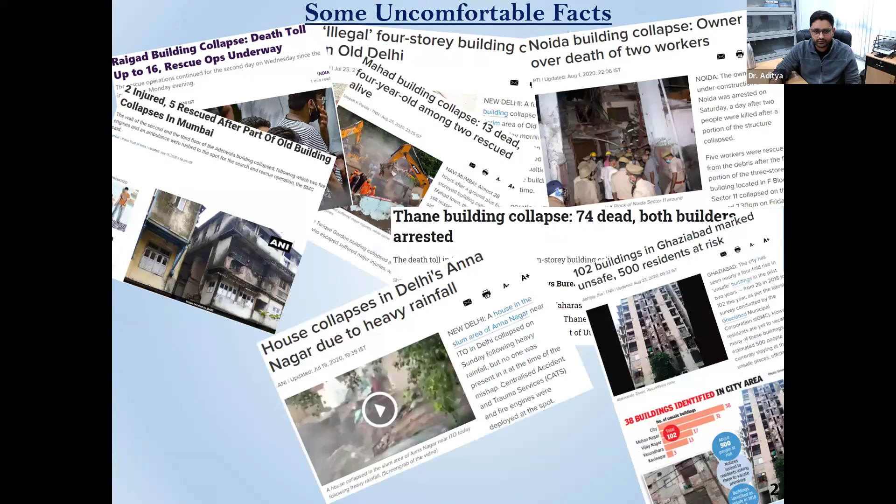Yes, so what I was talking about is this slide you are seeing, related to these unfortunate incidents that quite often occur in different parts of our country. Some important points: during the monsoon we lose more lives because of collapse than the flood itself. And as a civil engineer, do we even acknowledge this problem, the magnanimity or gravity of these problems, and what is our preparedness with respect to it?

I hope the screen and my audio both are good right now. Yes, it's absolutely fine. So now I would like to switch your attention to the statistical analysis that I have done in order to get an idea about the magnanimity of this problem.

I have taken the help of NCRB, the National Crime Records Bureau's data, for the period 1995 to 2015. This period was chosen because after 2015, NCRB stopped publishing data in this particular context, so we do not have specific data for the number of incidences of structural collapse and number of injuries. All the data I'm showing does not include losses due to earthquake; this is primarily data about collapse of structures under service loading conditions.

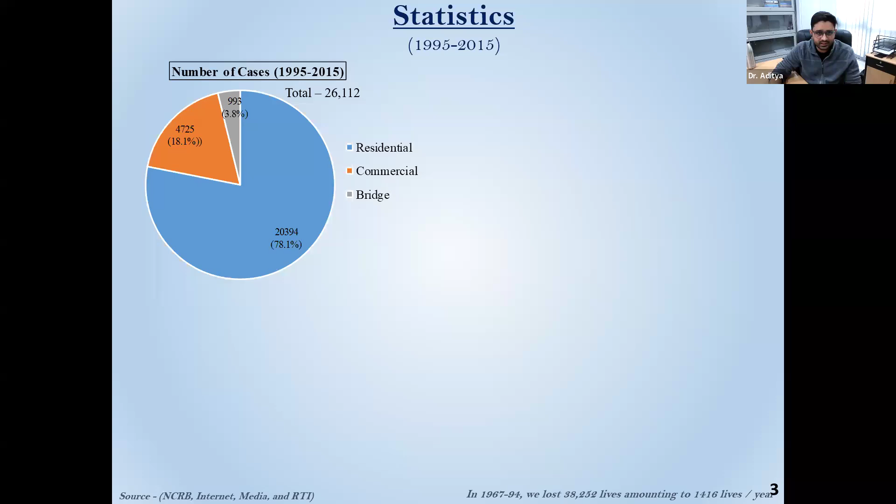In this period, the total number of incidents we saw was around 26,000 or more in these 20 years. Out of them, a majority comes from the residential housing stock, followed by commercial, and then bridges. The number of injuries recorded was up to 11,000 or more.

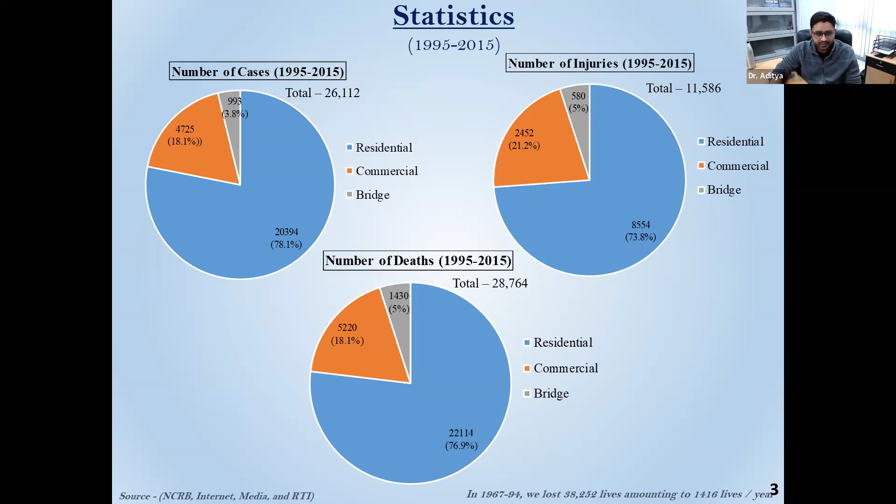These are major injuries recorded, and the number of deaths recorded is more than 28,000. So in these 20 years, leaving aside financial or other losses the country or society suffers, just the loss of human life is more than 28,000, which amounts to about 1,300 cases per year, or equivalent to about 1,450 deaths per year, just because of these collapses, though they happen in small pockets and therefore don't always come into our attention.

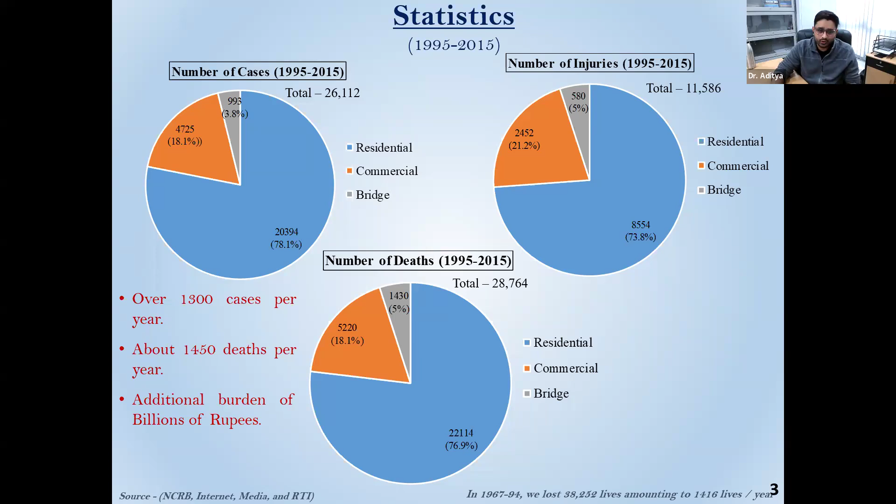Apart from these losses, we are also losing billions of rupees that the government needs to spend in order to compensate, along with loss of infrastructure and other things. So with these things in mind, achieving sustainable growth is a major problem.

When we include earthquakes also, earthquake alone caused approximately 14,786 deaths in this duration of 20 years, which is equivalent to 821 deaths per year. But if you exclude the Bhuj earthquake, which happened in 2001, this number comes out to be very low.

If you see, earthquake causes only 60 deaths per year. I'm not saying earthquake is not important—it is a major natural disaster. But in terms of loss of life and number of incidences, the losses we suffer because of gravity loading conditions are a very important and huge number.

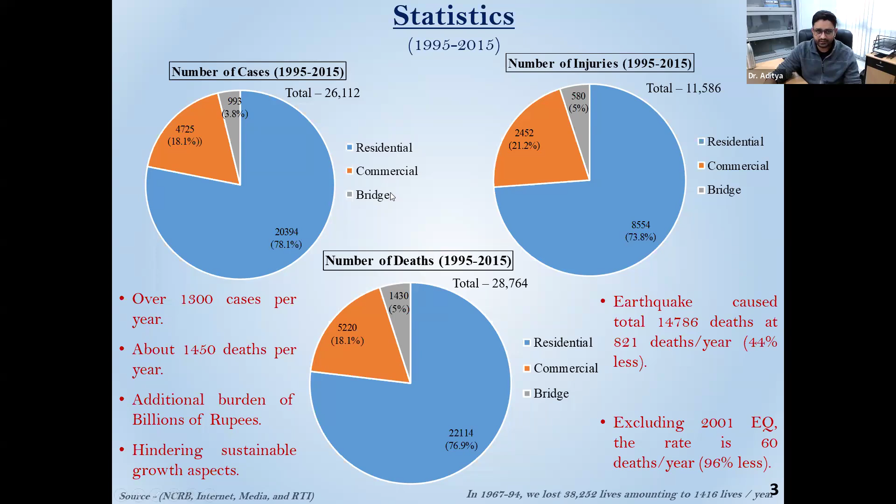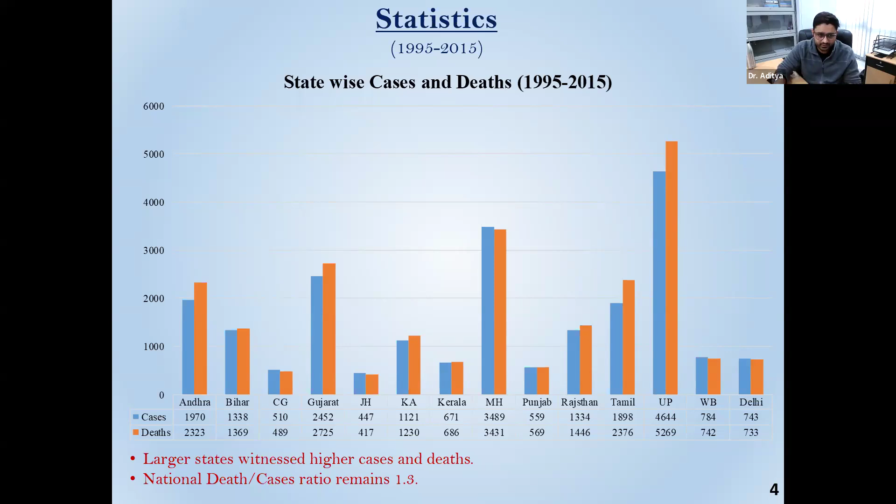So that's the importance of this particular domain. If you see the status with respect to different states of India, it is directly proportional to the population as well as the number of modern or high-rise structures present. The more industrialized or populated the state is, the higher the number of collapse cases and deaths. I hope this gives you an idea of how serious this problem is in terms of its consequences.

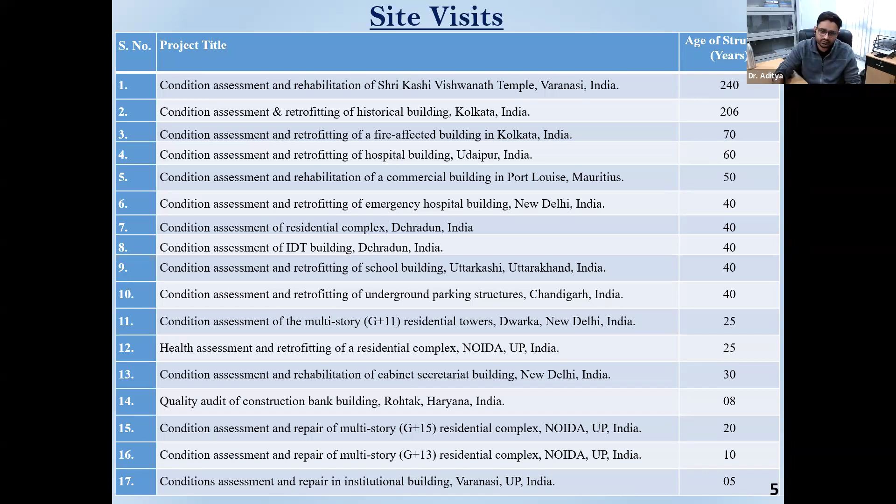Now within these structures, I want to pick only 5 types and give you a brief of these case studies, to show how the problem of dilapidation or premature aging looks at the site, and what could possibly be the reasons. For these 5 structures I have hidden the identity or project details, but just to give you an idea: case number 1 is a commercial building, G+3 story, a normal building with an age of 8 years.

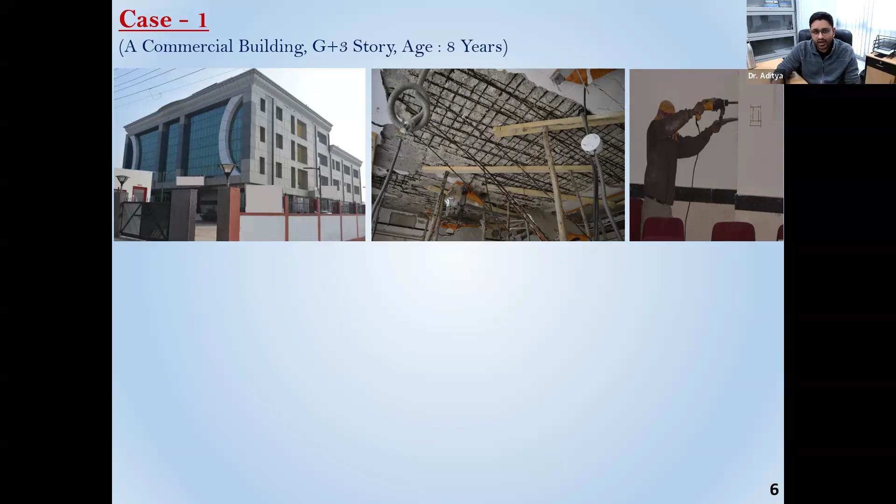So to save the life of the occupants, we had to order the entire building to be evacuated, and then a detailed investigation was done. It was an interesting case for us too—a building as young as 8 years, how could such an amount of corrosion occur?

We started to examine different sound-looking places across the structure, and found that even if the surface of the column, beam, or any RC member seemed fine from outside, when we drilled till the reinforcement level, we found severe corrosion at the reinforcement level. That was true for all cases—column, beam, slab, different locations, different floors, everywhere. So it was certainly a case of corrosion going on constantly in the reinforcement.

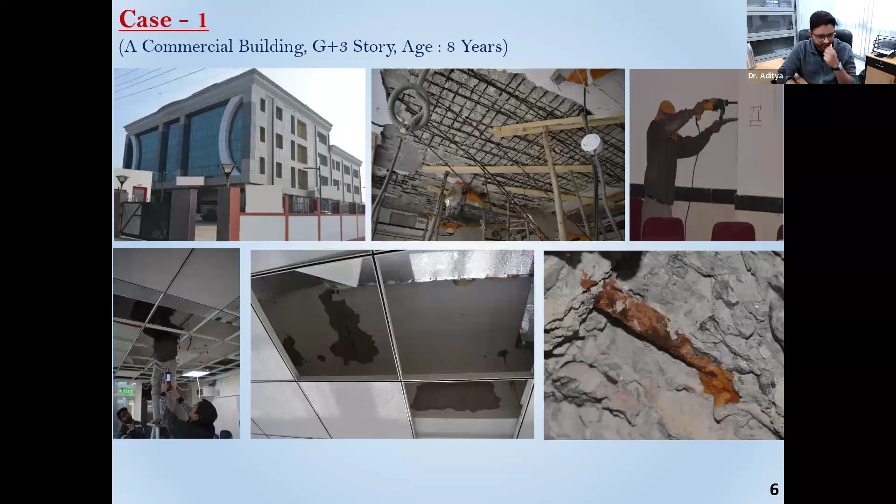So the question arises: what could possibly be the reason for such distresses? Because sometimes distress is located near wet areas or certain localities within the structure, with the rest of the structure seeming fine. But here, reinforcement across all locations was corroding. So we investigated further with the help of different non-destructive testing and chemical analysis, and found that the primary reason in this structure was basically the poor quality of water.

That means the water used during concrete making and curing had high sodium chloride, or NaCl, concentration in it, and therefore was not suitable for concreting. But it was used because in India, unfortunately, we give the least importance to water.

What we are drinking is still our concern, but what is being mixed in the concrete is not at all our concern. And no one can think that a building costing approximately 150 to 160 crore can be considered completely damaged or not fit for use just because of the poor quality of water, which is actually free. If you just give some emphasis to this aspect, it would not happen. But unfortunately, that was the main reason behind these particular distresses, and because of this, the entire structure was considered to be highly prone to corrosion.

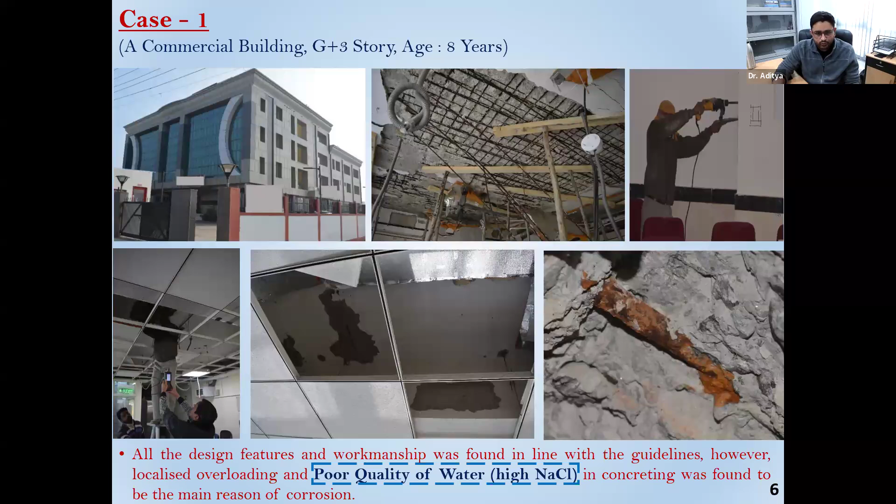Therefore, suitable measures after that were taken. So that was case one. I hope you got an idea of where they made a mistake, or where we are making a mistake. Number two, another case: a hospital building, a very important hospital building for India, located in a very important region.

It's a G plus 7 story building, aged more than 40 years, comprising a basement, ground story, and then plus 7 stories. You can see the weight coming over the columns at the basement is reasonably good. So when we were asked to visit the basement portion of this building, the ground to 7 story was fine because they were operational and largely fine. There were no major distresses at all.

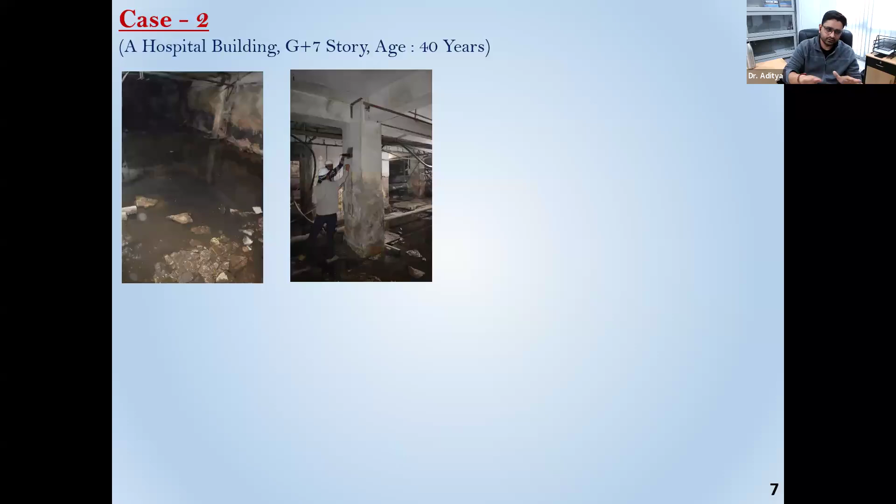But when we visited the basement, which the hospital authorities never visit because they consider that since this portion is not being used by the hospital, it is not their concern to see the health of the structure, this was the condition we found. You can see water accumulation all along the floor, around 1 to 2 feet high. It had been there for I don't know how many years, but it definitely resulted in deterioration of the entire slab portion of the basement.

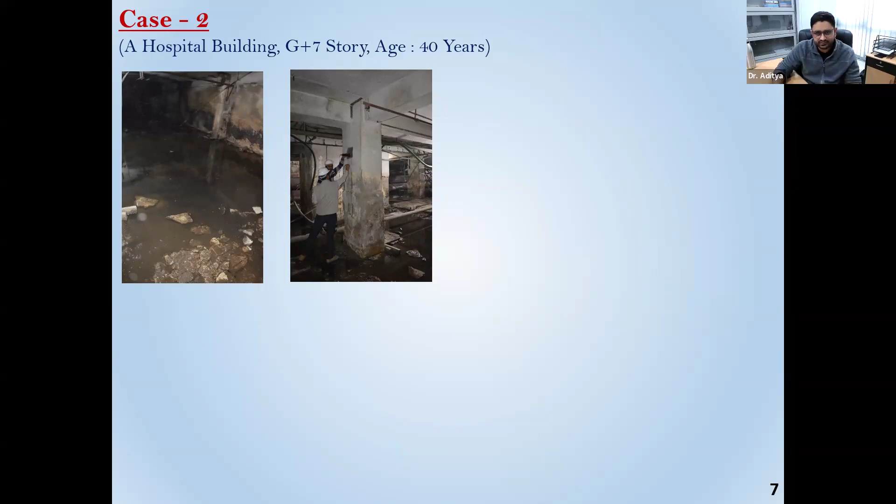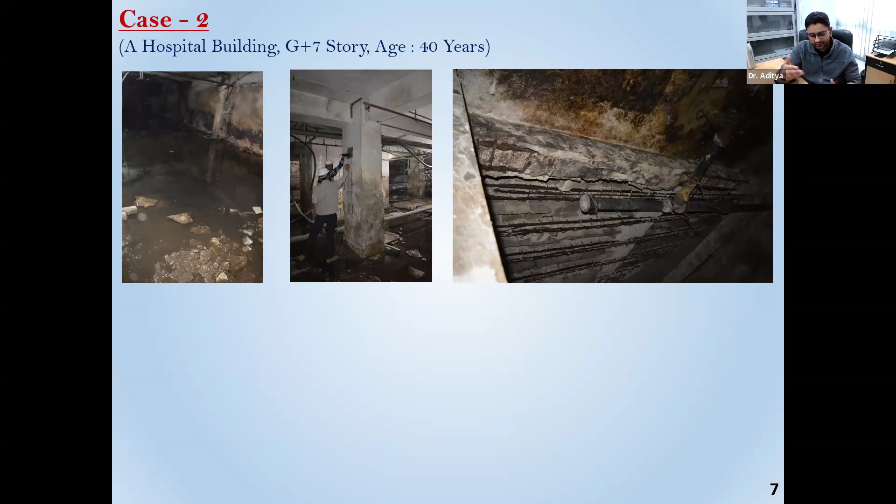But you, as a civil engineer, can understand that if your basement is not healthy, how can the buildings or floors above it be healthy? So we again cleaned it up and carried out entire investigations to examine the amount of corrosion and the aging potential. Everything was done, and it was figured out that the columns and beams particularly were found to be in a very good state.

Though these beams you are seeing were corroded, the primary beams going over here were found to still be in good condition. This structure had never been maintained at that particular portion of the building, but still the column beams were constructed to be of very good quality. They were still doing pretty much good, not corroded. The readings with respect to NDT analysis and potential, everything came out to be within range.

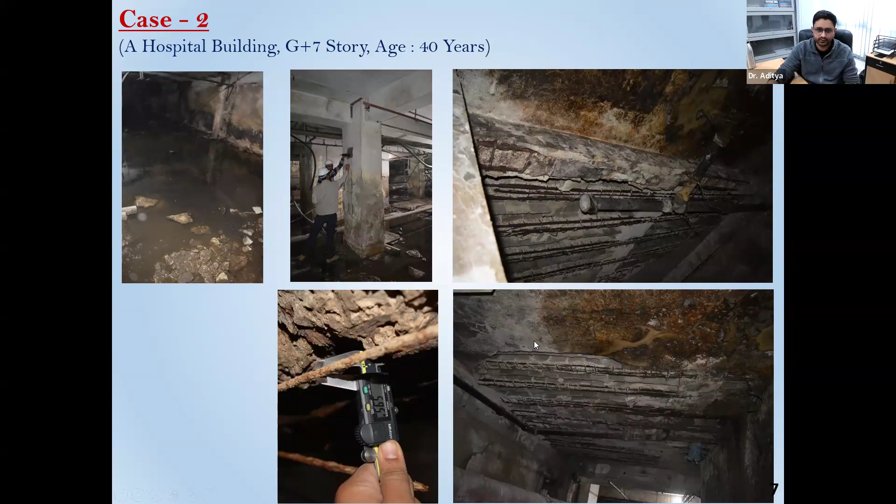But obviously the slab portion was completely damaged, as you can see here. So to conclude, the main problem in this case was primarily the ignorance of the maintenance team, or poor maintenance, which again is a very prominent issue in India. You will quite often find that government building stocks particularly are not being maintained properly, and within that structure, areas which are not visited frequently deteriorate. It could be a terrace, chhajjas, wet areas, store areas, or basements - areas without any functional use for the building are ignored, and deterioration takes place from there.

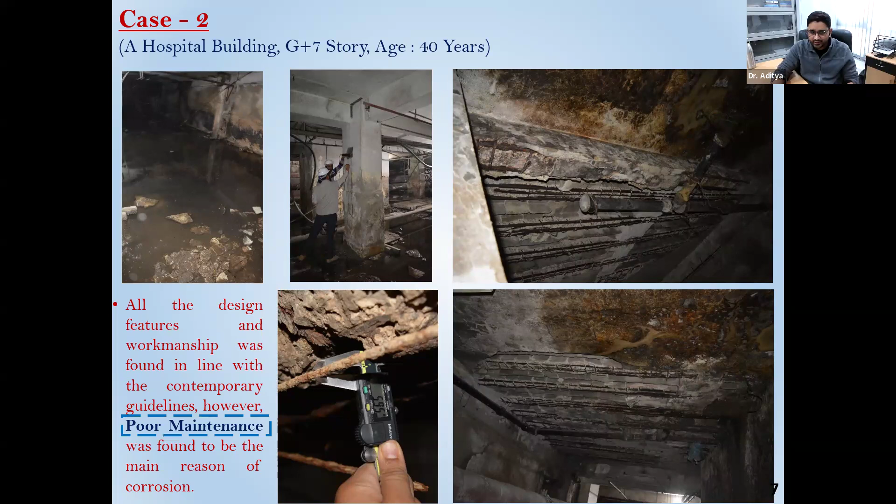So that was a case of poor maintenance, again a very important and very common reason in India if you go on site. The third case is again an institutional building, a G plus four-story building, as young as 5 years, just newly constructed, hardly handed over, but the authorities started to notice a problem that this building was having seepage throughout the year.

Throughout the year, it was having seepage issues from the expansion joint. There was water dripping continuously. Now that was a mystery for them because there is no piping going on, there's no plumbing involved here, there's no wet area nearby, but still throughout the entire building at the periphery and all the expansion joints, it was continuously dripping.

So this became a major problem because this building was a very important building, and it was mainly constructed with a fund of 350 crore. And you can understand that if these type of problems are occurring, a VIP visit or anything coming over obviously cannot be done in these type of scenarios.

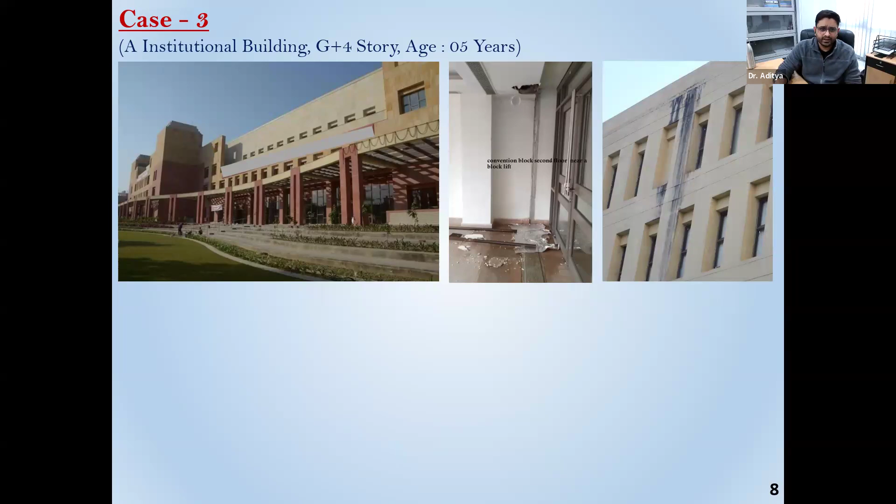So the authorities which were responsible for managing it contacted us, and then we visited this site particularly. You can see the water was dripping continuously all along the periphery, and this was actually causing the structural members to distress, because obviously if there will be seepage throughout the year, there are very high chances that the RC elements, be it beam, column or slab, will start to corrode, and that's what was going on all along the structure.

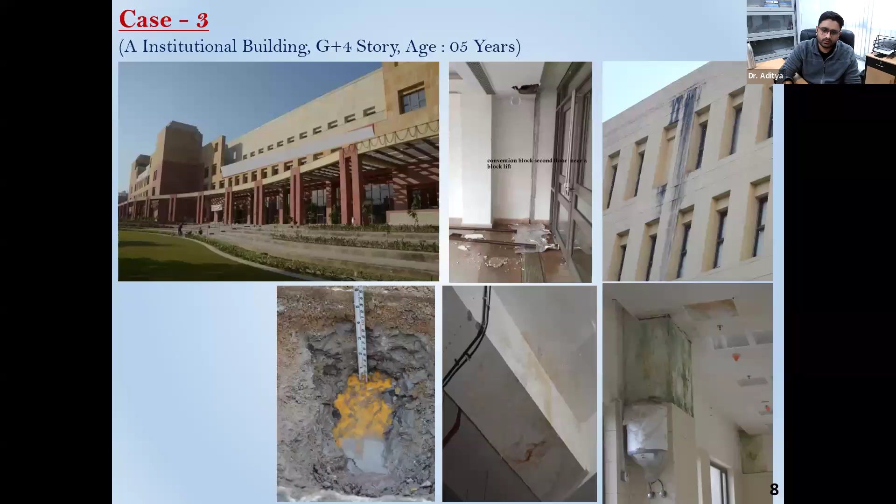So upon doing all the investigation, the main problem that was found in this particular structure was that the quality of construction is good, the maintenance is also fine. The only problem was the waterproofing treatment that they did to the terrace was not good enough.

So what generally is done is that at the terrace level, thermal insulating puff is given in order to provide thermal insulation to the lower stories, and then a waterproofing arrangement is done. So in this place, what they have done is thermal insulation puffing, but after that, the waterproofing treatment, basically a channelized polymer composite layer, is supposed to be provided in order to channelize the water if it is seeping through the RCC slab - it will basically be going toward the slope. That's what it is supposed to do, but that was actually not provided.

Maybe it was missed, or maybe it was intentionally missed. But because of that, what was happening? The water during the rainy seasons used to percolate through the PCC that was laid above the insulating puff, and it was basically being stored in this insulation because it's like a puff of 6 inches. So it acts like a reservoir which can hold a good amount of water.

And then this water used to slowly seep through all the downward sloping areas, be it a joint or be it on the periphery - wherever it was finding its travel, it would go there and keep on seeping at a very slow rate, and therefore you would find the seepage throughout the year in areas where it is not supposed to be, because there is no plumbing as such.

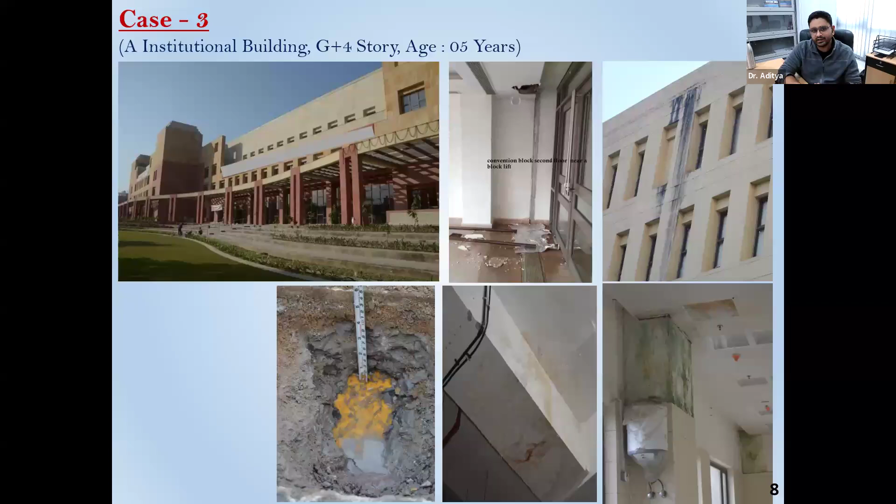So in this particular case, I can say that the build quality was good, the maintenance team was also very sincere, they were doing good, the material used was fine. But just because of one mistake - while doing the waterproofing, they missed the waterproofing itself, and they provided thermal insulating puff followed by a thin polythene layer and followed by a 6 or 8 inch PCC for the sloping. So that's what they have done.

And because of this poor waterproofing as the main reason, if you will see toward the terrace, this entire PCC of 6-8 inches on the slab portion had to be removed, and it cost around 4 to 5 crore to them to just repair this once again.

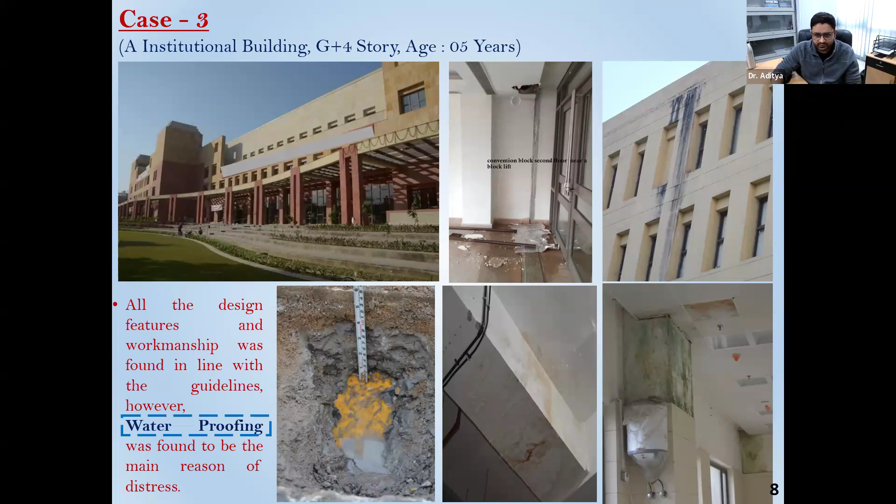So that was a problem, but it's good that the problem was identified early in the building's age, and therefore no much deterioration was caused. After successful replacement and doing the waterproofing properly, the building is now doing pretty good. But still, it is a case - you will observe that seepage through the terrace is a very common phenomenon in India. We do not take care of the slope or the waterproofing very seriously in normal housing as well.

Case number 4, again a hospital building. It's an old building constructed by the Britishers, during the Britishers' time. It was a random rubble masonry building, G plus 2 story, but originally it was constructed as a G plus 1 story building. The ground story had 20 feet height, so it was basically a heightened story followed by a normal height, that is 11 feet height of building.

So what happened after construction of this additional floor, the ground story started to show some cracks randomly, here and there, because the building was made with random rubble masonry. So the patterns of cracks do not follow a uniform pattern here.

And therefore, since it was a very important regional hospital, primarily responsible for childbirth and all those activities happening here, basically it's called Zanana Hospital. So the risk to the infants or the risk to the mothers was very high because this plaster was popping out continuously.

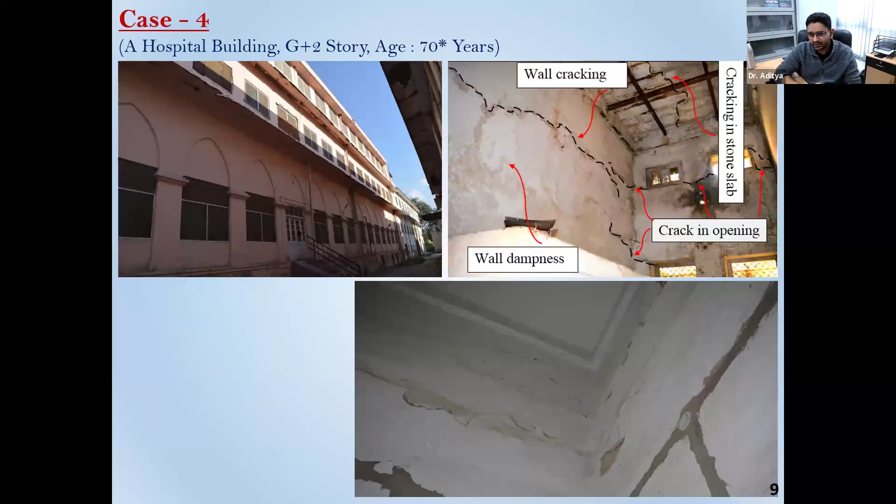And there were some incidences where it fell over some instruments or over the floor, and therefore it was suggested to first evacuate it because it was not seemingly safe. The things were not looking good in the ground floor story.

And when we did the entire investigation, structural analysis, and everything, we got to know that the building was primarily having these distresses because there was an additional construction or overloading done. So again, it's a very common phenomenon in India.

You will quite often find that people build an additional story without considering the strength of lower stories or the foundation, and that actually causes problems to the entire building. Because if your ground story is not behaving well, obviously there's no point having the upper story. The second story was constructed in 2011, but you cannot say its life would be 50 years, because your ground story will not live for 50 years in this scenario.

So that again is a very common phenomenon in India, which results in structural distresses, collapse, and losses, but we do not realize where we are making mistakes actually. So in this particular case, the main reason, the main culprit, was additional construction or overloading, I can say.

Obviously, instances of poor maintenance and lack of hygiene were noted and reported as well, because being a government setup, as I said, maintenance is a major challenge. So typically those areas of the building which are not functional or not directly used are ignored.

But we need to understand that a building is a unique entity. Every portion of it has to remain safe and sound in order for the other members to remain safe and sound. So that's what a civil engineer needs to understand. Maybe others may not, but at least we should understand that.

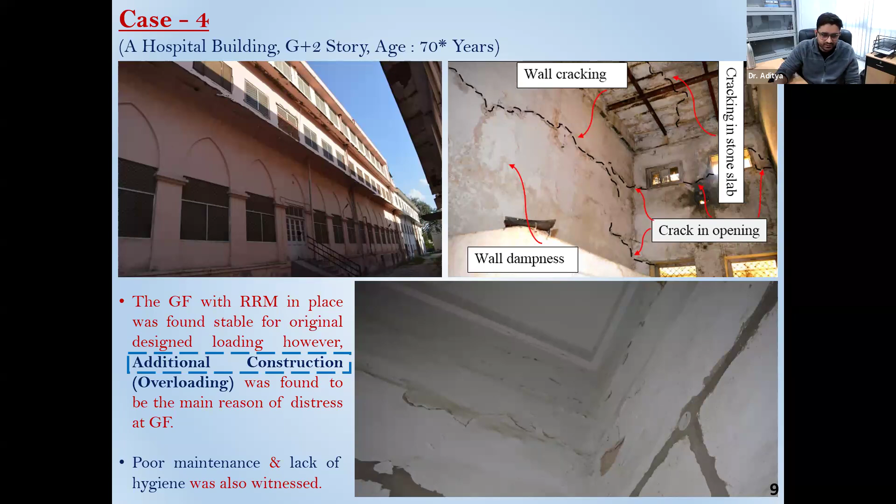Year of construction was 1968. When Mauritius got its independence, this building used to be the only multi-story building in their capital, Port Louis. It's a G plus 7 story building constructed by an Indian contractor, designed by an Indian company, and constructed for an Indian company. So basically, this again is a commercial building, as you can see.

We were asked to visit it because they have a rule of doing this routine checkup and maintenance. So we were asked, upon its completion of 50 years, to please visit and have a look at it or examine it, and if there is a problem, to please suggest. We did a detailed investigation of this building.

This building had a feature on the elevation: these fins that you are seeing are basically not structural elements as such. They are primarily fins which have been given to give it an architectural look or elevation. So these fins were obviously found to be deteriorating here and there, and that too in a mild or moderate range, not severe.

But the structural elements of it, the beam, the slab, the columns, were found to be in very good condition. I mean, we tried digging into the reinforcement level at various locations, and we were surprised to know that the bars, the ribs on the bars, the stirrups, any type of reinforcement that has been provided in the structural elements, is in very good state.

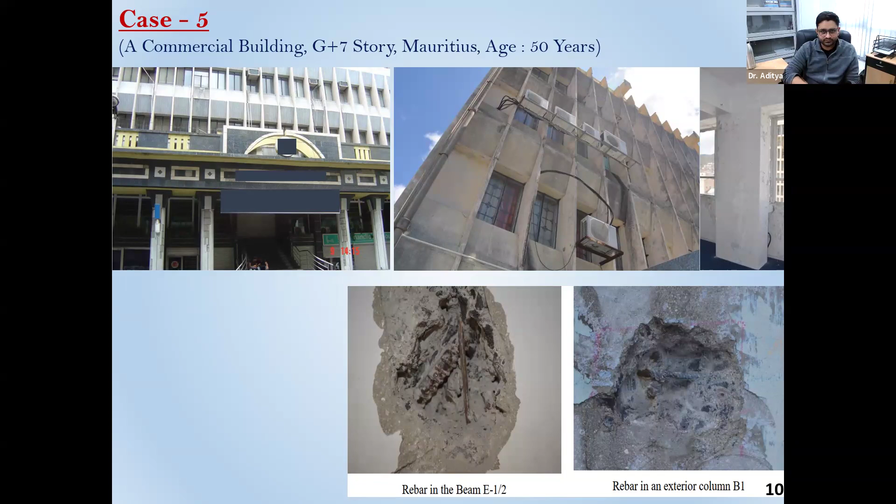We appraised the building and noted that some maintenance is needed in the elevation elements, that is those RCC fins. But apart from that, the entire building is doing great in terms of its health. There's absolutely no problem for this 50-year-old building. Again, I'd like to repeat that this building was constructed by an Indian, for an Indian, and designed by an Indian itself. So there was very good health despite no maintenance. There are very few cases when you will actually say in your reports that the structure is doing very good in its present state.

So with these 5 cases, I've tried to give you a glimpse of where we are going wrong, or what are the common mistakes that we are committing. Sometimes selection of wrong material or ignorance in choosing the right water can be the reason. Sometimes overloading can be the reason. Sometimes poor maintenance or ignorance again can be the reason, or sometimes some basic flaws during construction, such as wrong waterproofing, can also be the reason.

So whenever you visit a site for a structure to do its auditing or assessment, be aware that the reason can be anything, and every structure has its own story to tell. You just need to be objective about it, but you also need to have some of these pictures in your mind about what could possibly be the reasons.

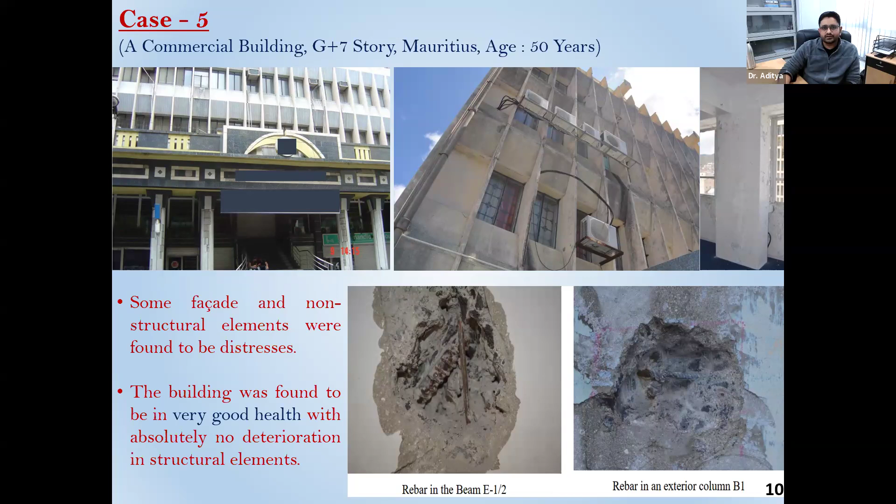So now, what are the consequences in terms of their structural response? With that, I'm switching to my research objective. But before that, just to summarize my field work: there are 3 stages in a building's life. First is pre-execution, where we do survey, planning, design, and all those things on paper. Second stage is execution, and third stage is post-execution, where maintenance comes into picture.

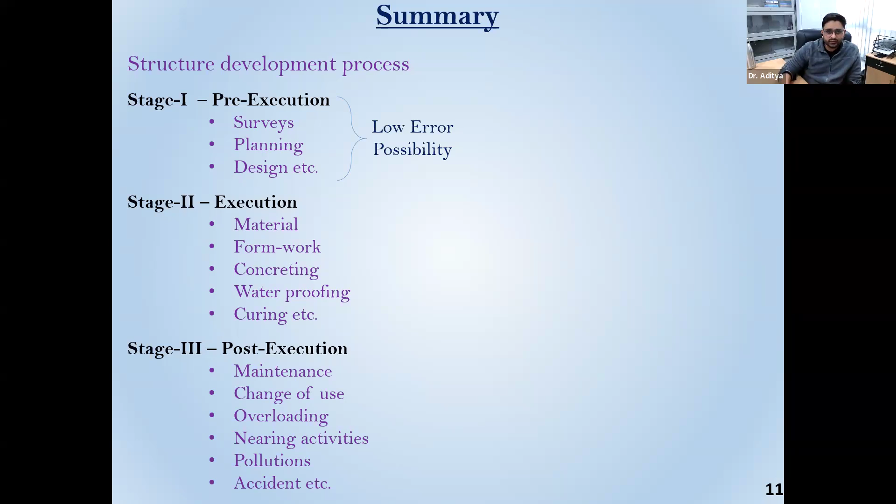Pre-execution obviously has a very low error possibility. It's not that we cannot go wrong at this stage, but the probability of going wrong is very low, because everything is being done on paper, and therefore all the checks and design guidelines are being followed here. But still, because of wrong considerations, we can go wrong. The high error possibility lies in stage 2 and stage 3, where because of wrong material or substandard qualities and various other reasons, our structures can suffer in this particular domain.

So be careful in whichever execution or whichever stage you work on in the industry. Just see if the structure is showing some signs of distress, and try to attend to them at the earliest stage possible, in order to avoid what happened, as in that structure which I showed you for waterproofing. Now that structure is doing pretty much good. But the structure which I showed you for using wrong water, that structure unfortunately either needs a very high maintenance cost now, or it has to be demolished.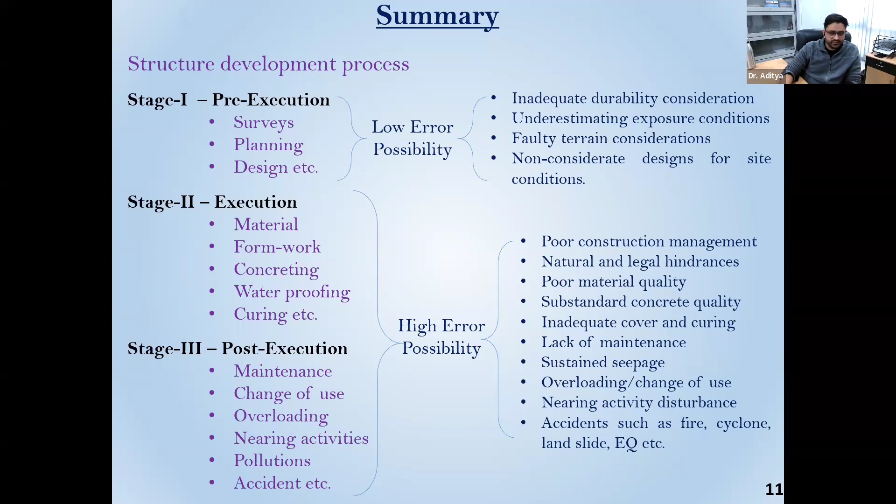There's no other option. So with that in mind, let me now conclude whatever we have done. For dilapidated structures, or to make our structures resilient, we basically have 2 options. One is, for new structures, what should be our approach? For new structures, obviously, we need to utilize the latest materials that are available, which are less susceptible to corrosion.

If I talk in terms of RC structures, we need to follow the guidelines. We need to make sure the quality of our construction material remains good, and most importantly, the maintenance part should be done sincerely for new structures. So material becomes a key word here. For existing structures which have already been constructed and are already suffering, which already have some type of distress in them, choosing or designing innovative repair strategies is the only solution. When I say innovative repair strategies, I mean ones that would be feasible in terms of their economy as well as their application.

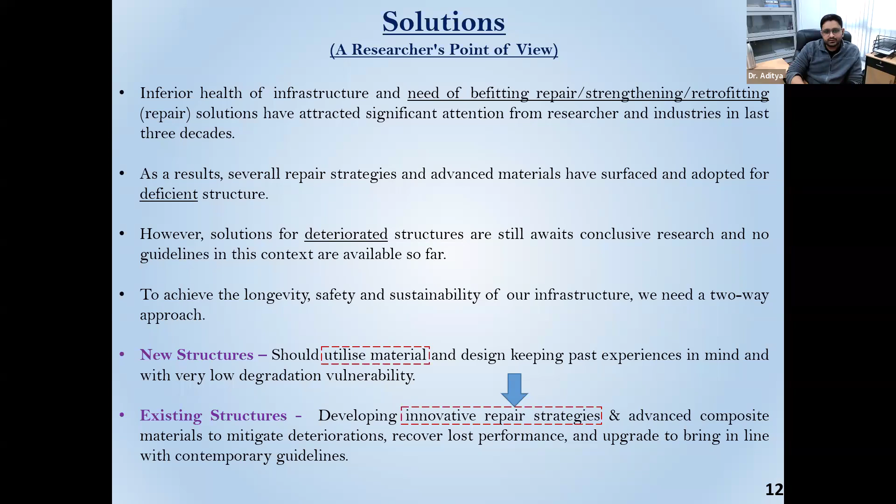That is where my research is primarily focusing - to assess the structural response of a structure which already exists, and then design if there is some gap in their performance. So with that, I would just like to brief on the problem that I am trying to address.

Dr. Praveen, if I am going out of time, please let me know, so that I just adjust. Sure, okay.

This is a typical structural frame for a building. You can see it may have foundation, column, beam, slab and all, and these are primarily the RCC elements. Sometimes wall can also be there.

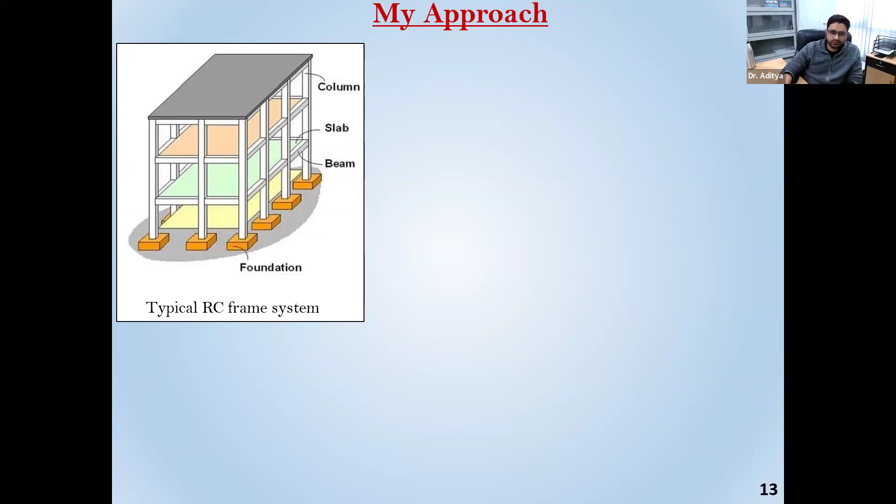Within that, I have selected column, though all the structural elements shown are important. Columns become of prime importance because they are responsible for the overall stability of the structure. If a beam in a local area fails, it would result in local failure of that area, but if a column fails, it may result in the collapse or progressive collapse of the entire structure.

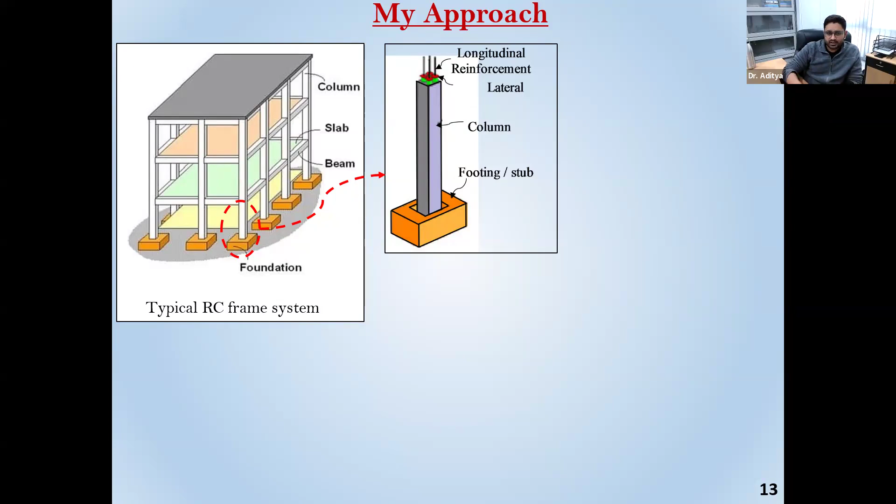So basically, failure of a column cannot be seen in isolation, and columns are sometimes considered to be the most deteriorated portion of buildings that I have seen in my field visits as well. Here you can see some columns where there is corrosion, and the rebars have been corroded to different extent.

When these columns, already subjected to axial loadings, are also subjected to seismic events - a lateral form of loading - how are they going to behave? In normal conditions, they'll only be subjected to axial loadings, and if there is eccentricity, there will be some moments as well. But earthquake plus gravity is the worst kind of loading scenario a column will generally be subjected to.

So with that, we had two questions in mind. Question number one was: what is the effect of corrosion on seismic response of RCC columns? Basically, a column which has been designed considering the full capacity of the rebar - if that column gets corroded, how is it going to behave, or what would be the reduction in its seismic response?

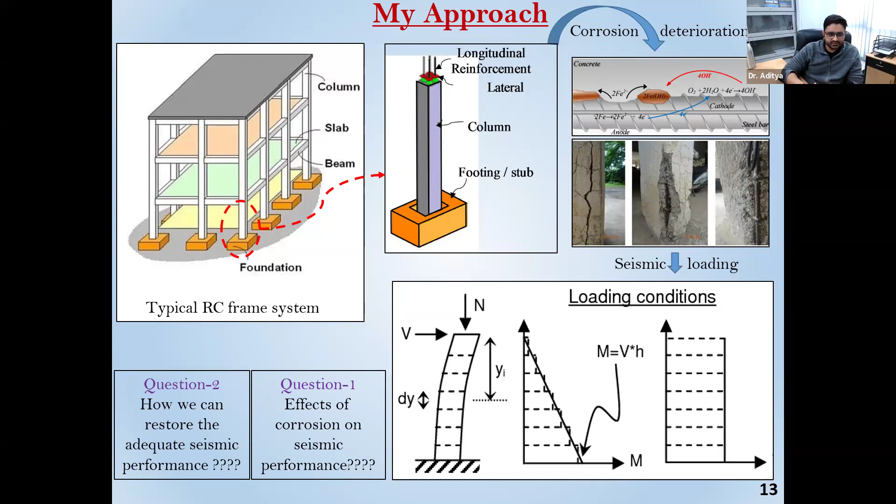Second, if we know the amount of seismic response which is lower than desired, how can we bridge this gap with designing suitable retrofitting strategies? How can we restore adequate seismic performance? That's question number two. With these questions, the present discussion will go on from here, which is basically my research work as well.

In my research, which was primarily experimental in nature, I prepared different types of column specimens. You can see here a column-footing assembly that we prepared. We constructed around 17 such columns with different configurations.

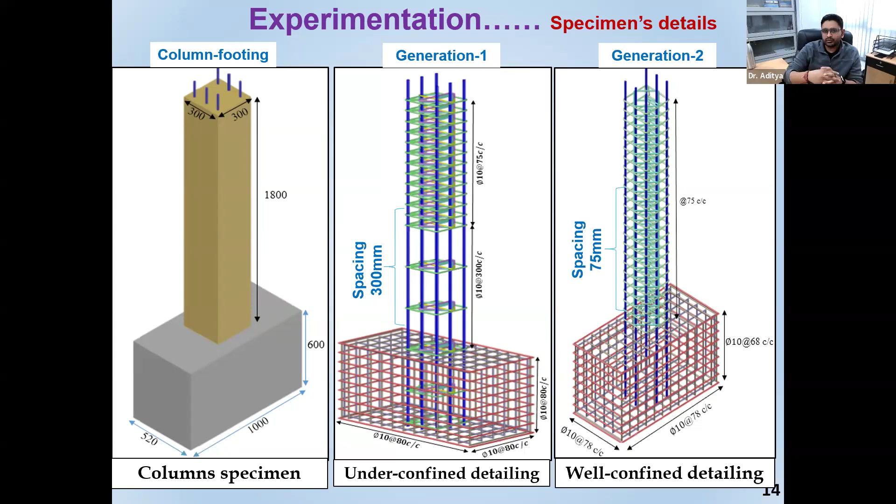So post peak, how the column behaves is governed primarily by the amount of lateral reinforcement provided. Generation 1 columns seem to be slightly on the deficient side, whereas generation 2 columns have more lateral reinforcement, and therefore are generally expected to behave in a more ductile or better manner with respect to seismic response.

With that in mind, I prepared a total of 17 columns, of which 10 were generation 2 columns and 7 were generation 1 columns. Generation 1 basically means under-confined, which has lower confining reinforcement, and generation 2 means well confined, with adequate confining reinforcement. So generation 2 or generation 1, or well confined versus under-confined, are basically the same distinction.

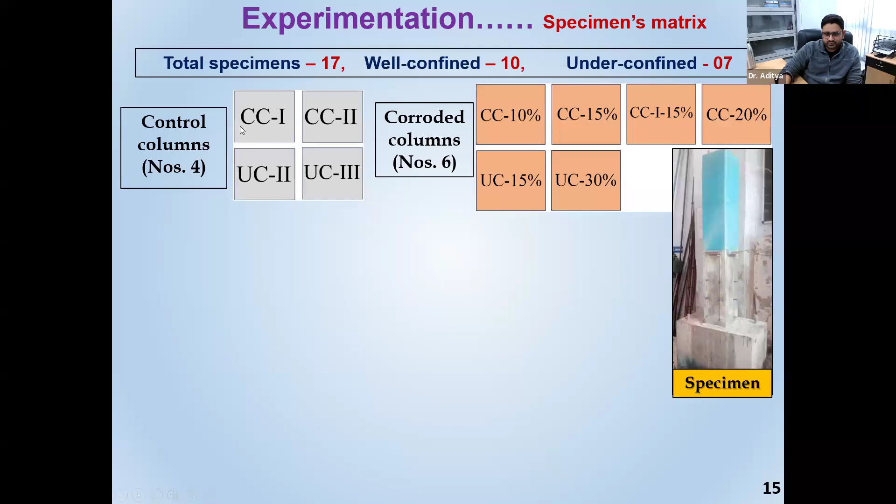Out of 17 specimens, 4 were columns not corroded, in their sound state. 6 were corroded, and the remaining 7 were corroded and then retrofitted either with UHPFRC, an advanced composite concrete type called ultra high performance fiber reinforced concrete, or with the second material used for retrofitting, glass fiber reinforced polymer, or GFRP.

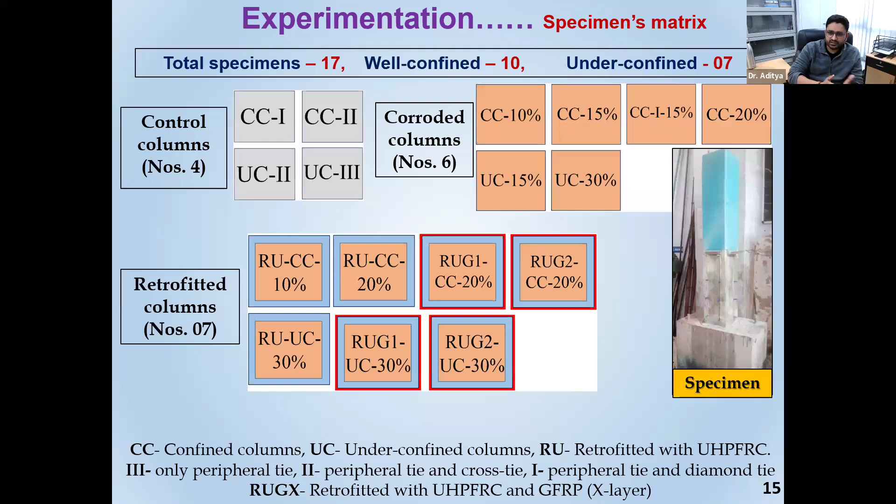There were different stages of retrofitting that we carried out based on the response we got from the previous column. That's how we proceeded.

This was the testing setup. This is the actual picture of the testing setup and the amount of instrumentation that was done.

My primary focus was on the potential hinge region, so all the instrumentation was provided there in terms of LVDTs to record rotation and curvature experimentally. The lateral load was applied at a height of 1500 mm from this face, making the lever arm 1500 mm at this point.

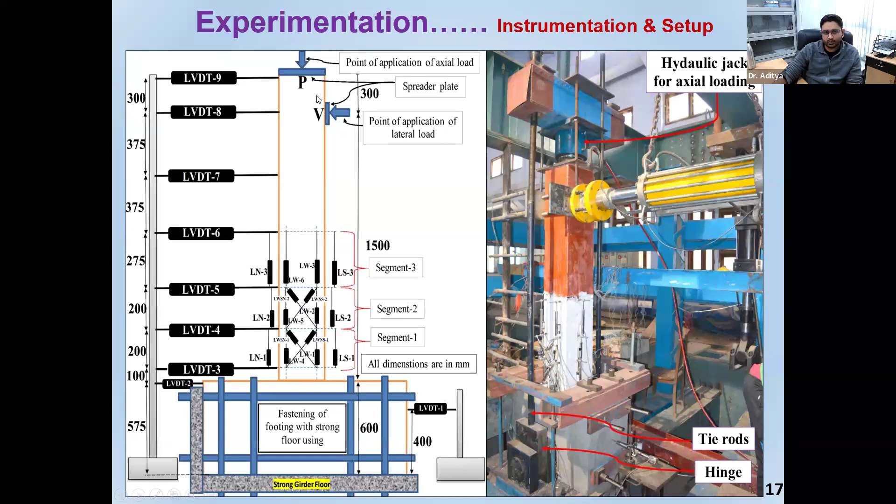Total height of the column was 1800 mm. An axial load was applied there, which simulates the actual gravity load acting on a column during an earthquake. So that was the loading condition and instrumentation.

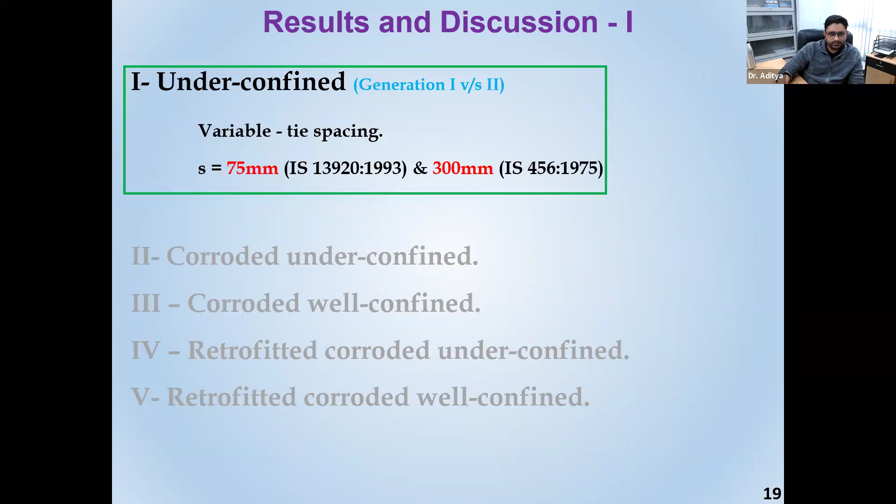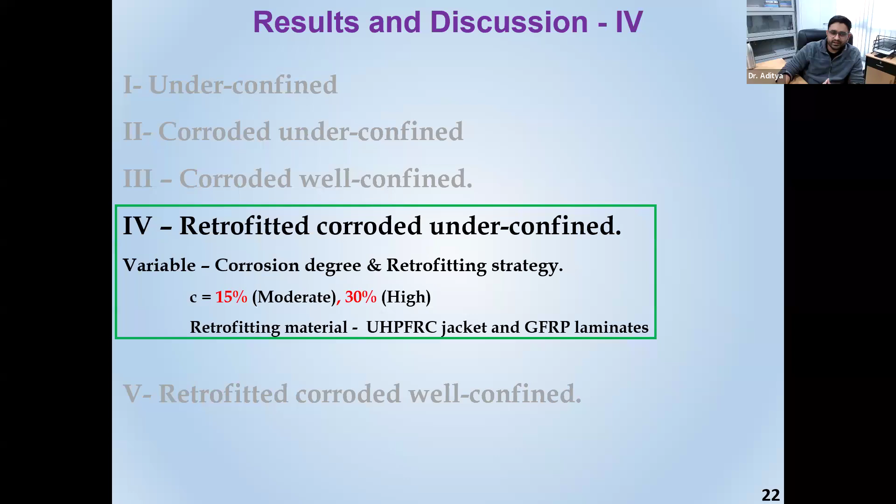Now I'll move quickly. Objective 1 was comparing generation 1 to generation 2, with no corrosion involved. Objective 2 examined the effects of corrosion on generation 1 columns, then effects of corrosion on generation 2 columns, then retrofitting and efficacy examination for generation 1 columns, and then retrofitting efficacy quantification in objective 5 for generation 2, the well confined column.

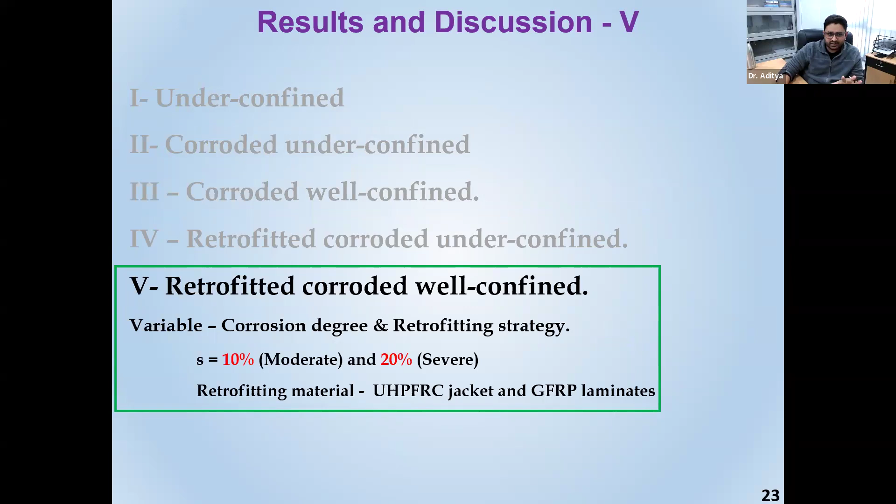So I'll only discuss objective 5 in this presentation to save time. In objective 5, I had a total of 7 specimens, one at 0% corrosion. Objective 5 was for well confined columns, generation 2 columns designed as per the latest Indian design guidelines, which are expected to yield desirable seismic response.

But what happens when they get corroded? The code does not say anything about it. We need to quantify this response - if it was supposed to give this performance, how much is it giving now. So 0% corrosion basically represents the control column, which gives the ideal state: this much ductility, this much energy absorption or dissipation, and these load capacities.

So 0% is the control column, and all others are compared to it. The second column had 10% corrosion, the third had 20% corrosion. Then there was a retrofitting series: 10% plus retrofitting, 20% plus retrofitting. If the performance didn't come out desirable, I enhanced the retrofitting efforts - apart from UHPFRC, adding one more GFRP layer, and then 2 GFRP layers. That's how I proceeded.

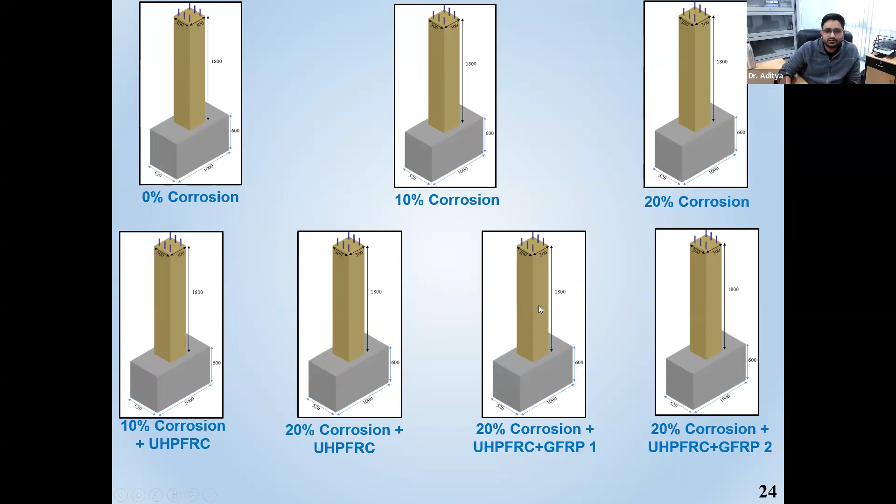Now this shows the different steps of the construction.

So cage preparation, then we attached different strain gauges over here, if you can see it. Then it was prepared and cast in a mold. You can see over here, the column, everything was planned in a way so that we could easily construct it, because it was a full-scale structure.

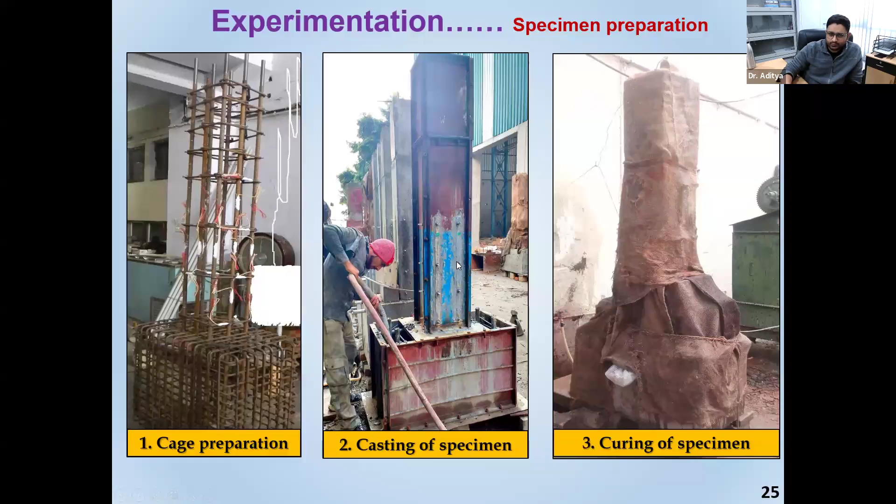Therefore, curing was done. Then after curing, they were cleaned out again. And we did a GFRP wrapping over here.

As I said, in this region we provided closely spaced stirrups in both generation 1 and generation 2 columns. We also retrofitted it earlier, wrapping it with GFRP just to make sure that this region remains always extra strong. This region obviously remains strong because of its size.

So this region is the one where we'll notice or quantify all the failures. This is why we are focusing on this, because that's the potential hinge region. That's where we are expecting the failure to occur. That's where the field studies have suggested this is the zone of failure, where the failure actually occurs on site.

So therefore, we are only focusing our test length on this region of 800 mm, which is this total length. This entire 1800 mm - this 800 mm, okay, which is the test region.

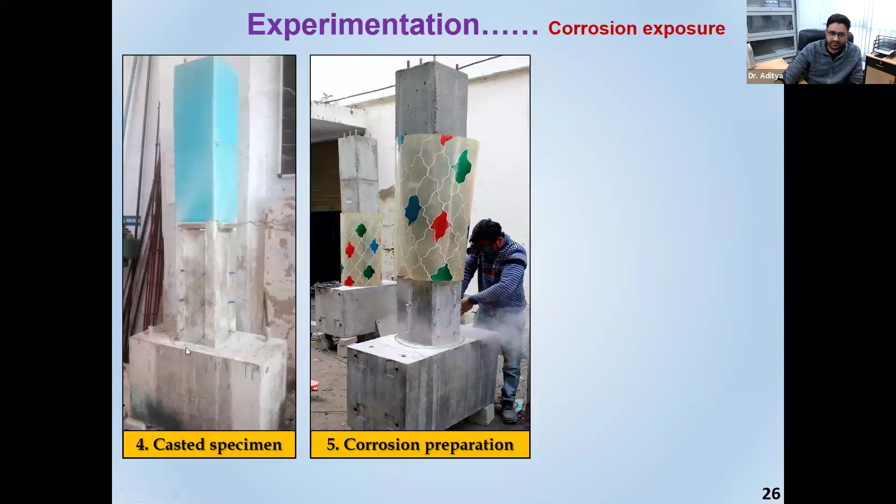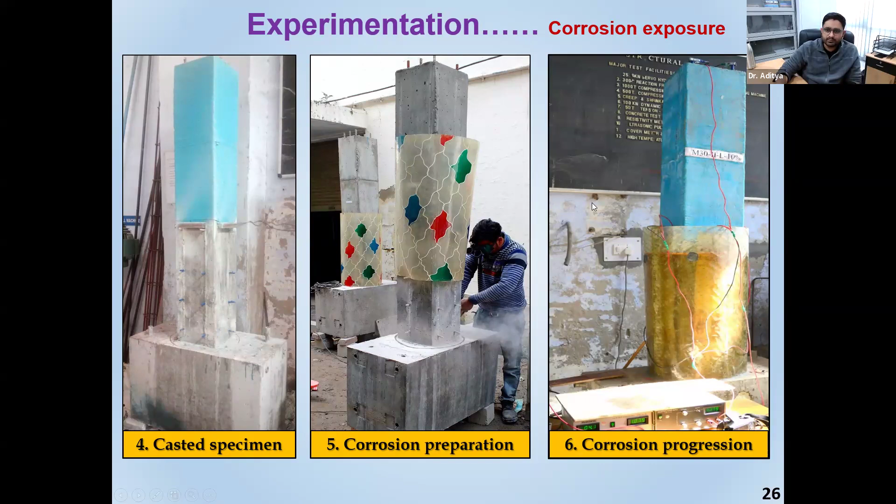Then we prepared it for corrosion. Then the corrosion was started. You can see over here, sodium chloride solution has been given. These are external DC machines. There's this entire setup for external corrosion, which is called the impressed current-based technique.

After corrosion, you can see over here, this region has suffered a significant amount of corrosion. These are corrosion byproducts which you are seeing over the surface of it. Then it was cleaned, cracks were noted, cracks were recorded, all of them.

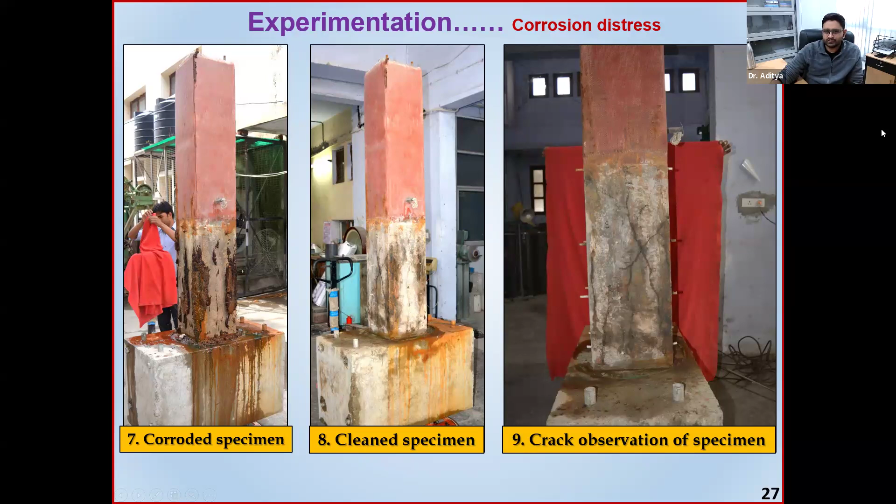Then it was tested. So the columns which were supposed to be examined only for corrosion were examined after this stage in the test setup, which I showed you earlier, with head actuator and all that instrumentation. But those structures or columns which were supposed to be retrofitted after this stage were then sent for retrofitting.

So for retrofitting, we removed the cover concrete because that was damaged due to corrosion. We examined and cleaned all the reinforcement that you are seeing over here.

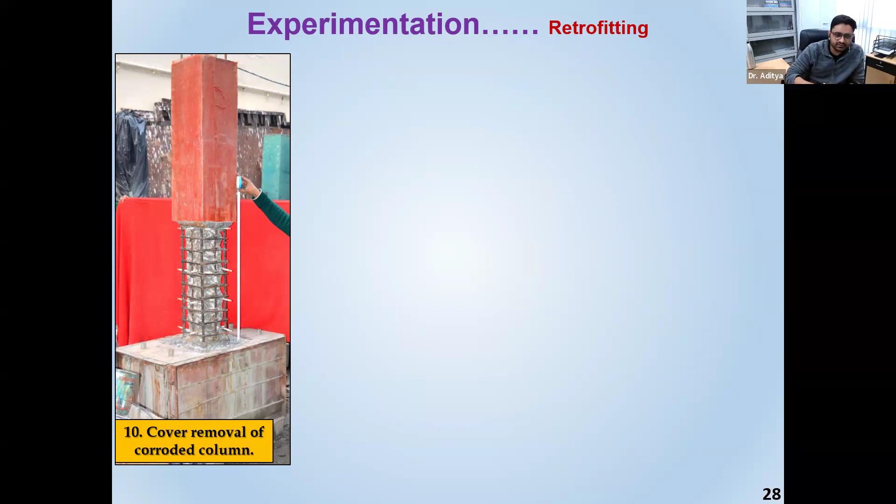Now, after this stage, there can be different ways of retrofitting and their efficacy may obviously differ. We chose to go with a convenient one, which is to restore its cross section with a higher grade of concrete, which had some flexural strength as well, and some fiber as well. So that we called UHPFRC.

You can see over here, we are pouring it again after applying the molding. And you can see that after pouring, we recovered the concrete, the cross section once again. But now this concrete is basically the UHPFRC concrete at the cover. On the core, obviously it remains the same M30 grade concrete, the normal concrete.

So that was my retrofitted specimen. You can see neither its weight has increased, nor its cross-sectional size has increased - there's no increase as such. But at the same time, we have applied at least one layer of retrofitting, which is only using UHPFRC.

Now we will examine this specimen with the same testing setup, and then we will compare it with the normal 10% corroded and 0%, that is the control column, and we'll examine whether the load capacities are good enough, the ductility is good enough, and all those things with the help of the 8 indices that we have calculated.

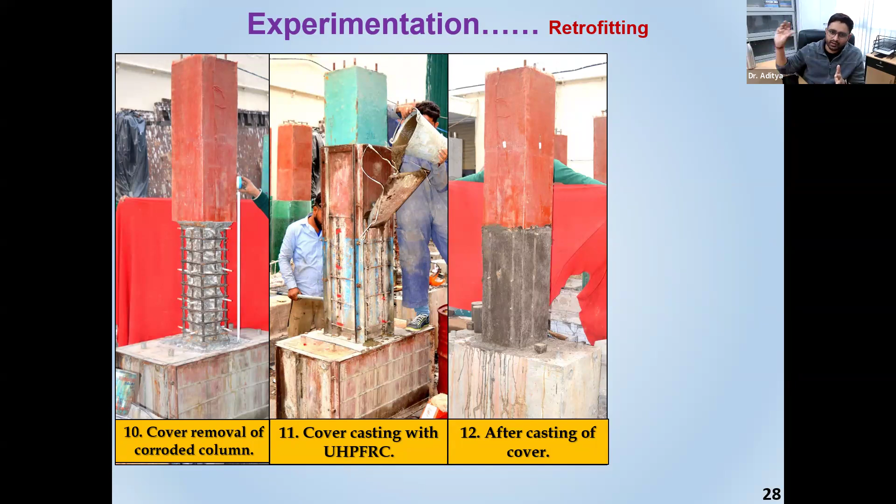If the performance was found not good enough, we will again cast a column, corrode it to 10%, remove the cover concrete, retrofit with UHPFRC, and now retrofit with one more layer of GFRP. So that's how the experimental plan had to be.

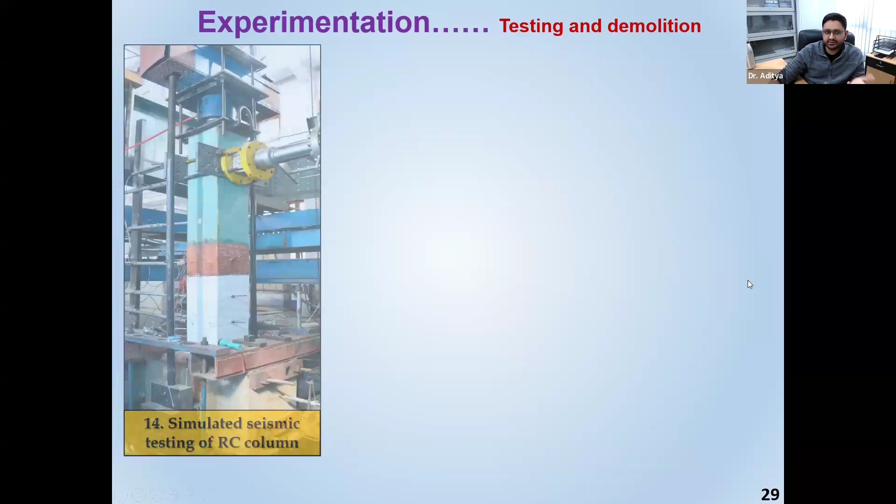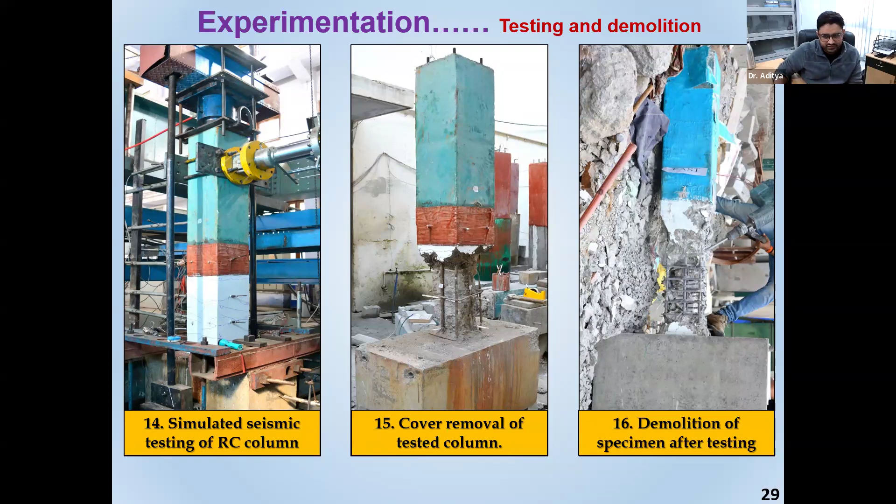Specimens were weighed again to record the amount of mass loss, which determines the degree of corrosion. So the 10%, 20%, 15% corrosion figures are actually rounded. The original amount could be 14.8% mass loss, or 16.2%, or 20.2%. So I give it a category like 20%, with a variation of plus minus 1% always. If I'm targeting 15%, it can be somewhere between 14 to 16%. That's what I've done in my experimentation. So this was the entire treatment given to the specimens.

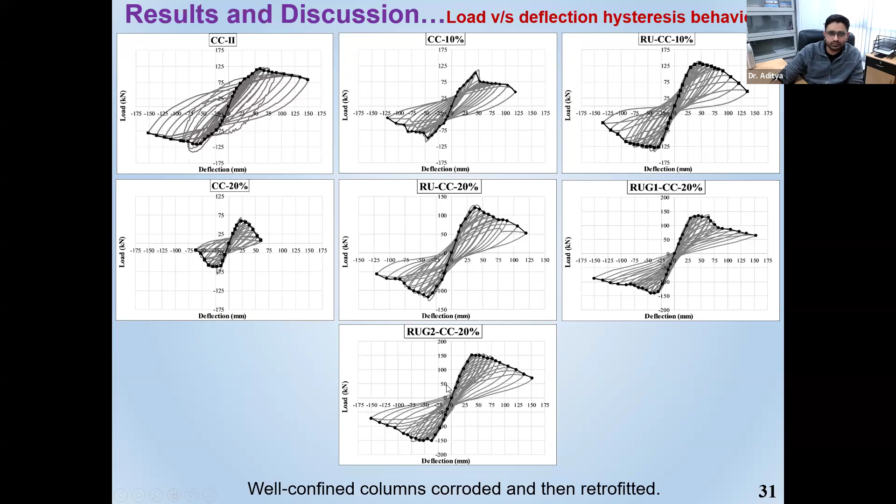This was the control specimen, then 10% corroded, you can see its performance has reduced, then 20% it has further reduced. For 10%, when we do retrofitting with RU, meaning retrofitting with UHPFRC, its performance has jumped back to almost the control level. Similarly for 20%, the response has increased. We again have G1, that is 1 layer of GFRP, and G2, that is 2 layers of GFRP. So the response keeps increasing as we keep adding the amount of retrofitting. Same goes for other parameters.

Here I've compared the backbone curve of those hysteresis responses, just to give you a visual comparative understanding. Here you can see the lateral load, or flexural strength, of the column is compared.

The control column, if I assume it to be 1, that is the normal column which has not been corroded, designed as per the latest Indian guidelines, is supposed to be 117. So that was the flexural strength I got for a normal, non-corroded column.

Then when it corroded by 10%, there was a reduction of almost 15%. That means now it's only 0.85, or 98.9 kilonewton, which is 85% of the control. Then when I retrofitted this column with only UHPFRC, the lateral load capacity increased again to 128, which is even 10% higher than the control column. That seems acceptable to us because we've completely recovered. So even a column which has been 10% corroded, if we retrofit it using only UHPFRC, we can recover its complete lateral strength or load capacity.

Then for a column corroded to 20%, the reduction in lateral load capacity was 49%. We only got 59.3 kilonewton, whereas it was 117 kilonewton for the control, so you can see a 49% reduction. Then we retrofitted it with UHPFRC only, you can see RU here. Then we retrofitted it using RU G1, that is 1 layer of GFRP, and 2 layers of GFRP. So just by having RU, meaning only retrofitting with UHPFRC, we recovered almost the same strength as in the control column.

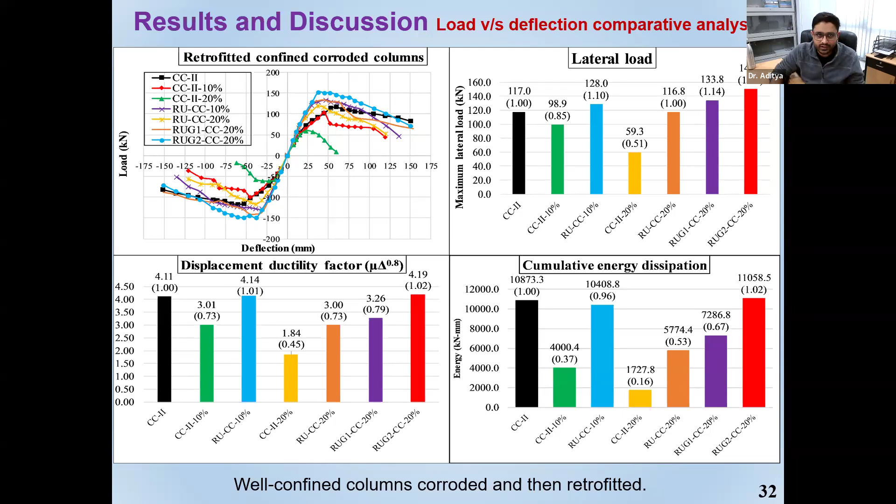You'll have to make some qualitative, quantitative assessment, which is what we're trying to do here. Same goes with cumulative energy dissipation. So we continued with the retrofitting, increasing the amount of GFRP until we received acceptable lateral load capacities and acceptable or comparable ductility factors and energy dissipation. That was the condition for the retrofitting. Obviously, we are doing retrofitting just to have a desirable response.

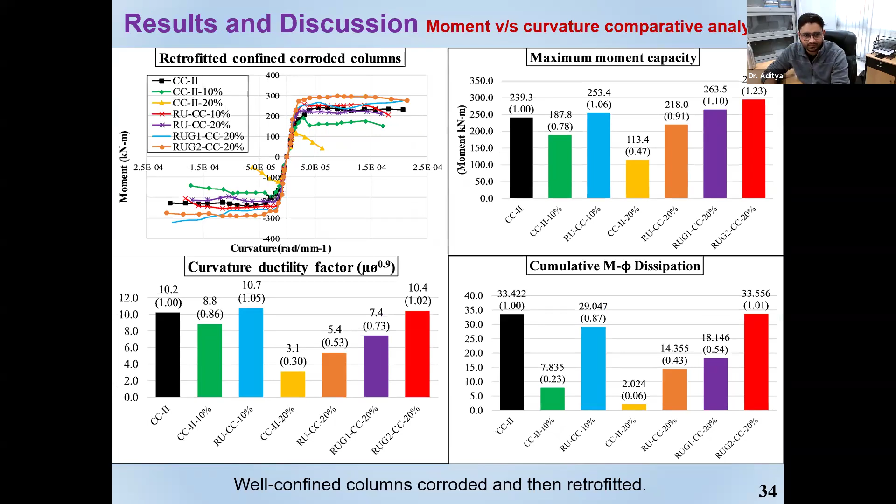Same goes with other types of indices. I won't spend much time here, but similar trends were noted: a reduction during corrosion, then a slight increase, and then a reasonably good response in the post-peak or peak response domain. Same goes with stiffness degradation, axial load degradation, and energy dissipation.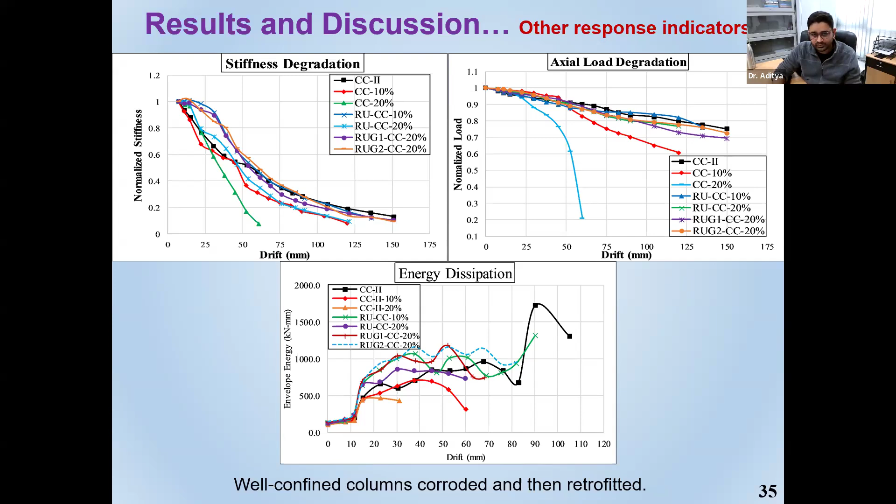These are also very important indices when it comes to seismic response. If a structure has a higher amount of seismic stiffness degradation, it's supposed to have larger drift ratios, which may be a problem with respect to collapse or other structural distresses such as cracking. So stiffness degradation is not expected in the columns, and corrosion actually affects the stiffness or axial load capacities of your column significantly.

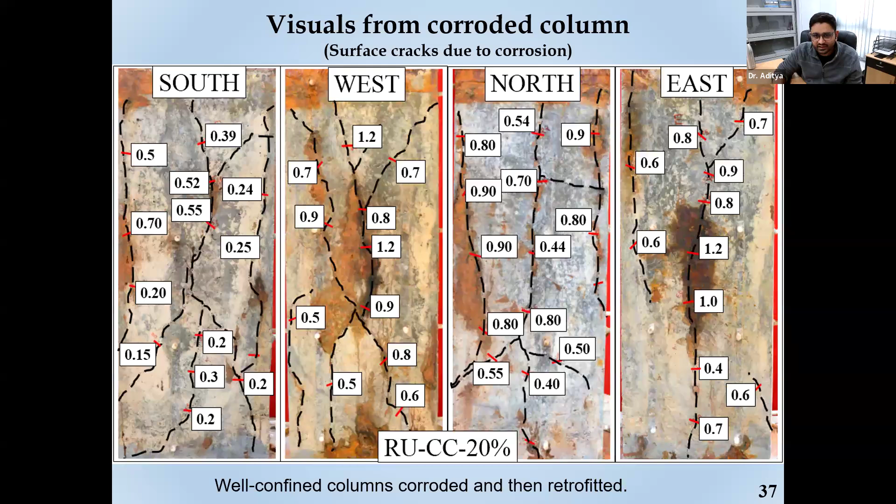These are some visuals from the experiments. You can see the corroded columns—these are 10% corroded columns, and this is a 20% corroded column at the surface. You can see the width of the cracks in mm, 0.7mm, 0.4mm. It's basically randomly distributed all across the test length, which is 800mm.

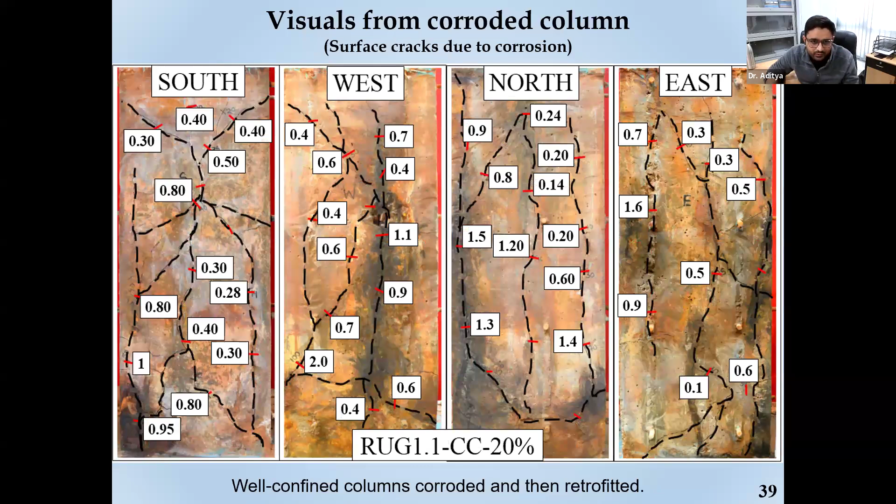These are the visuals of the reinforcement of the 20% column. This is one 20% column, this is another, and that is another 20% column. You can see the visuals are very different—both are 20%, but this one seems more severe.

That's what I was trying to say: you do not have any control over the distribution of corrosion. It can be distributed across the entire test length, or concentrated more in a given domain. You do not have any control over that. Here, in this 20% column, some bars got completely lost, so we can always say the response of a corroded column is a function of the corrosion itself, its distribution, and all those things, which is very random.

But still, in order to reach a conclusion for an existing structure, like I showed during the case studies, what should our approach be? How should we go about it? We'll have to somehow quantify the corrosion present in the structure, and then do retrofitting, which should be validated at some forum. So that's one way of doing it.

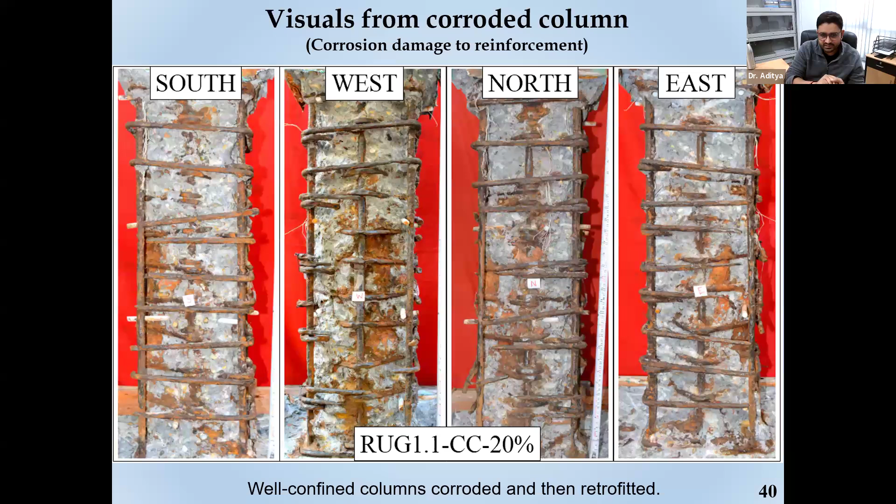We have developed a retrofitting strategy that can be applied on site because it doesn't add any additional weight or cross-sectional area. At the same time, it can have a very good lifespan because we are using composites—FRP wrapping—which basically prevents moisture ingress and such, so the durability of these retrofitting systems is very high compared to conventional RCC jacketing or steel jacketing. These are all the points I wanted to convey; this is the solution I'm proposing here.

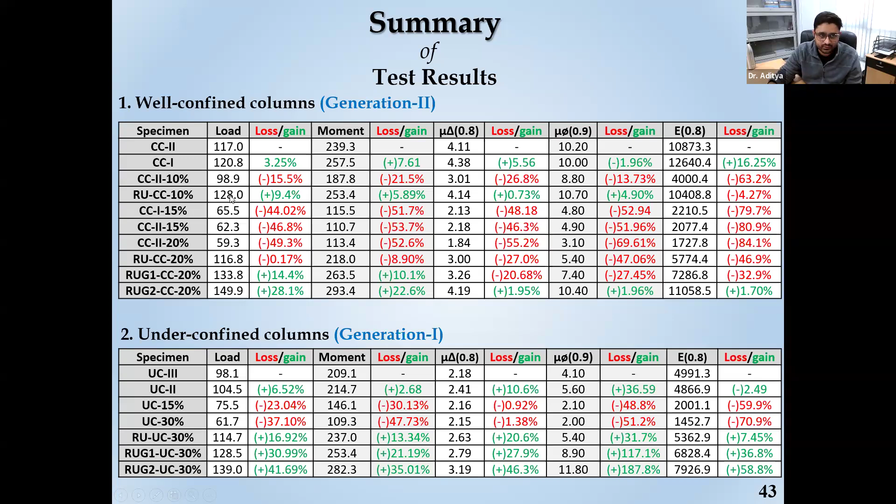So that's just a summary of my experimental setup—again, for different indices, what was the gain and loss with respect to retrofitting or corrosion, for generation 2 columns as well as generation 1 columns. And some important conclusions: columns with larger tie spacing or lateral reinforcement behave inferior in seismic response. Obviously, the amount of reinforcement is lower, so the seismic response is also lower.

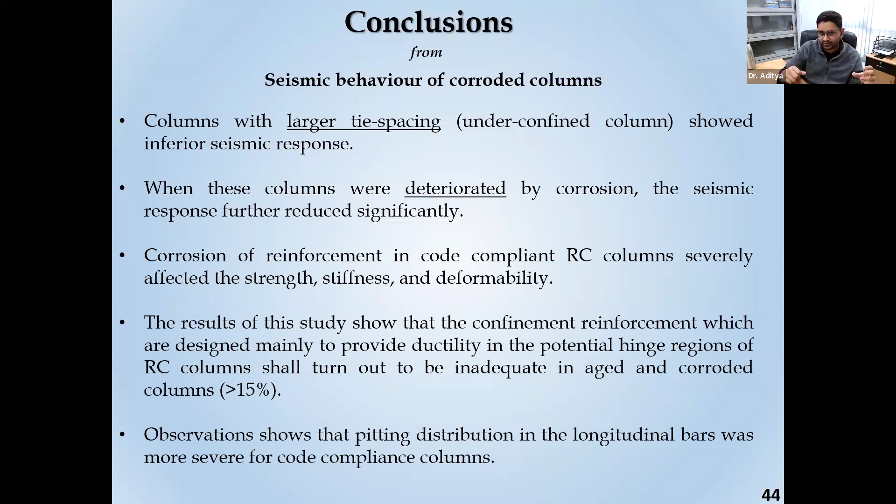When these columns were deteriorated by corrosion, we saw the seismic response further degraded significantly. The RC columns, made in compliance with current Indian guidelines, still behave very inferior when it comes to corrosion. After getting corroded, their seismic response was even lower than under-confined columns which have not been corroded. So if there's an under-confined column on site that is more than 50 years old but not corroded much, and another column just 5, 6, 8, 10 years old but severely corroded, the severely corroded column would behave even worse than the older one. It all depends on the amount of corrosion at that point in time, and the response reduces to such an extent that we have quantified it.

Similarly, when it comes to retrofitting, for UHP FRC alone, if you go on site, quantify the corrosion, and find it close to 10%, you can go ahead with the UHP FRC jacketing itself, but you need to execute it properly. Using UHP FRC alone, you can achieve a good amount of lateral load capacity as well as ductility. But if the corrosion is more than 10% or in the range of 20%, UHP FRC alone may not give you the desired ductility, and you'll have to go with additional GFRP or other composite materials such as CFRP layers with it.

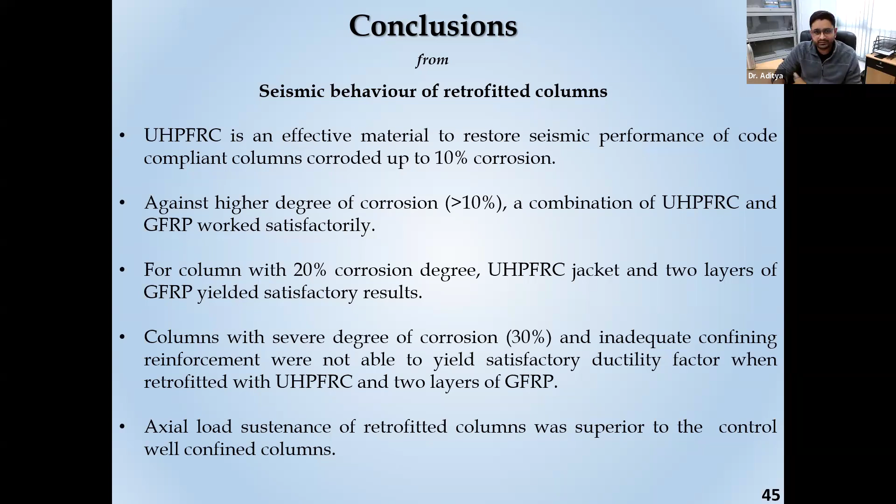The corrosion and the retrofitting also showed their own effects on axial load capacities, which we observed as well. These are some of my publications from similar work I have done, and this work is still being continued in a numerical format by one of my PhD students. These are some of the publications. So thank you very much for your time.

I hope I have not exceeded the time. It was around 40 minutes. You're absolutely bang on time, Dr. Rajput. Thank you so much. Thank you.

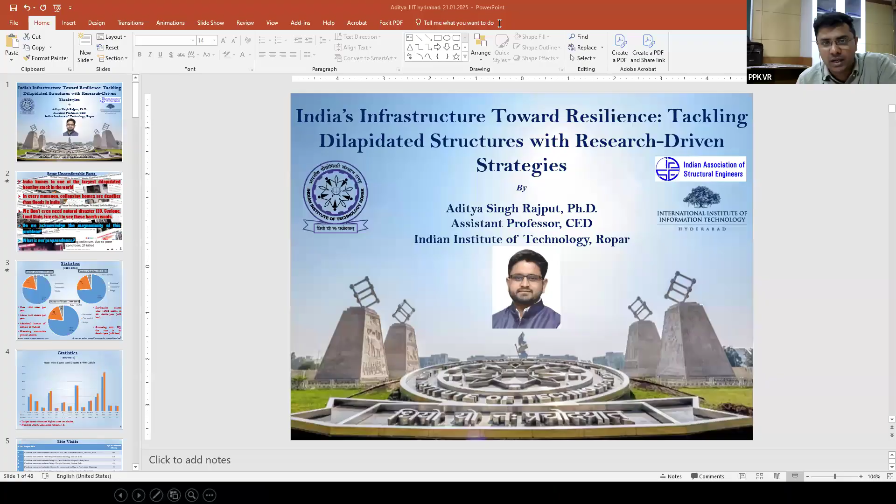Thank you, sir, for giving your valuable insights on the primary challenges India faces in maintaining and upgrading aging infrastructure, repair strategies adopted for deficient structures, safety and sustainability approaches for new and existing structures, and how retrofitting is essential to enhance structural performance.